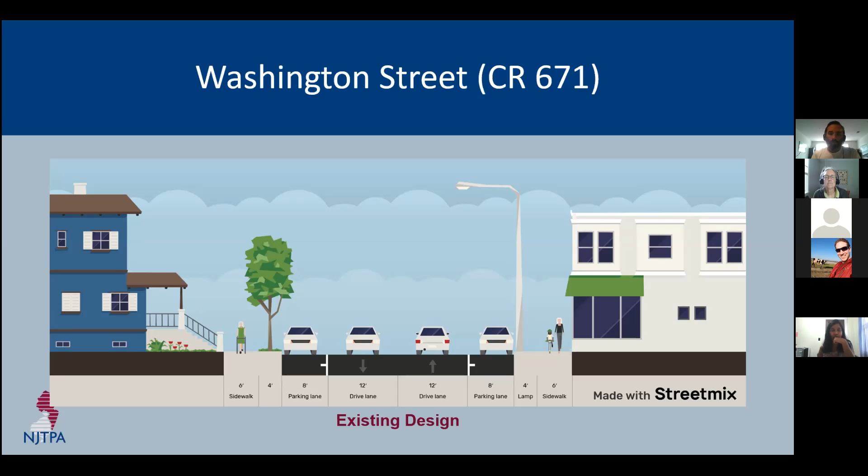So the first issue that we heard during the walk audit was related to vehicle speeding and some confusion about parking. So currently there's no speed limit signs along the corridor. It's not clear actually if the speed limit is 25, 30, or 35 miles per hour. So we propose adding signage, of course, to make it clear to drivers what that speed limit is.

We also observed illegal parking along the corridor. In some cases, this illegal parking was caused by missing or confusing signage. For example, this no stopping sign, like in the picture, has no corresponding endpoint. So the vehicles you see in the background, it's not actually clear if they're parked illegally or if a sign is missing. In some cases, illegally parked vehicles can block visibility, creating a dangerous situation. So that's why it's important to address these parking issues.

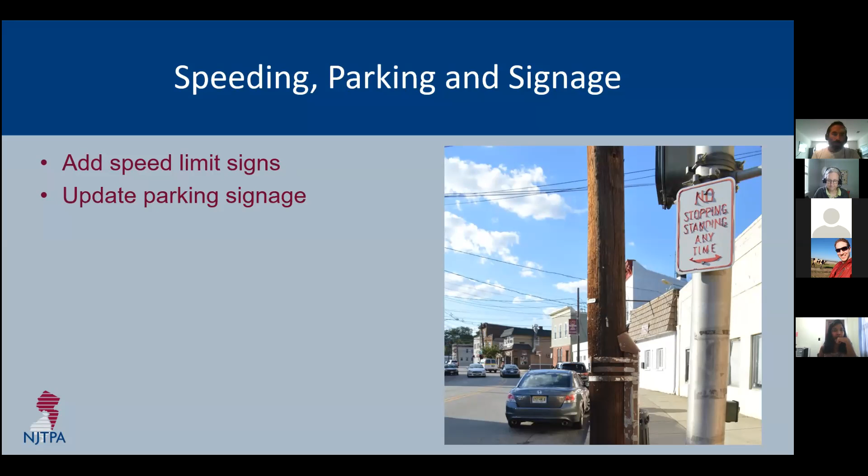Aside from reviewing and updating the signage, we propose clearly defining parking spaces using striping. This has the added effect of visually narrowing the roadway when no vehicles are parked, such as in this photo when there's no vehicles there. This is in Newark. And doing that can help lower vehicle speeds a little bit.

Additionally, by clearly marking the no parking areas, you can prevent some illegal behavior. And as an added benefit, you also avoid angry residents who think they were ticketed by mistake because it's really crystal clear where you can and cannot park.

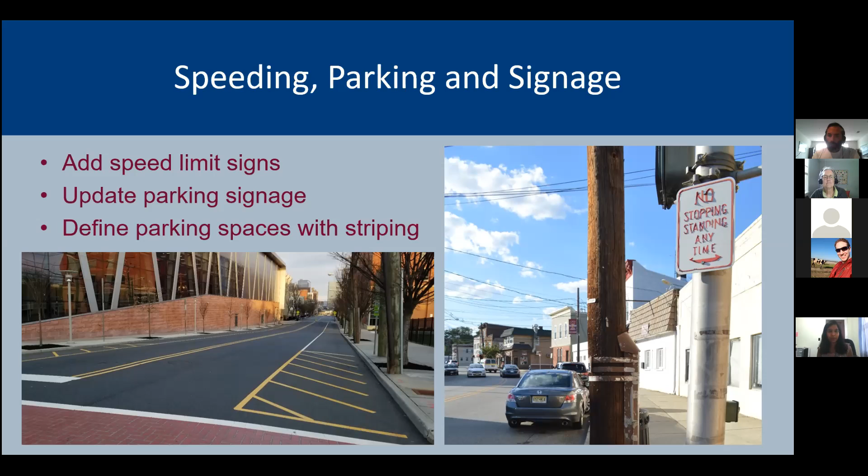All right, so continuing on with the concerns about speeding, parking, and signage, parking next to corners is illegal in New Jersey because it blocks sight lines and can make it difficult for large vehicles to make turns. So aside from striping the no parking areas, we also suggest adding physical deterrents at some intersections. These can include soft-hit bollards, especially in areas where trucks might be turning. But in other cases, this provides an opportunity to add bicycle parking, which is missing along the corridor.

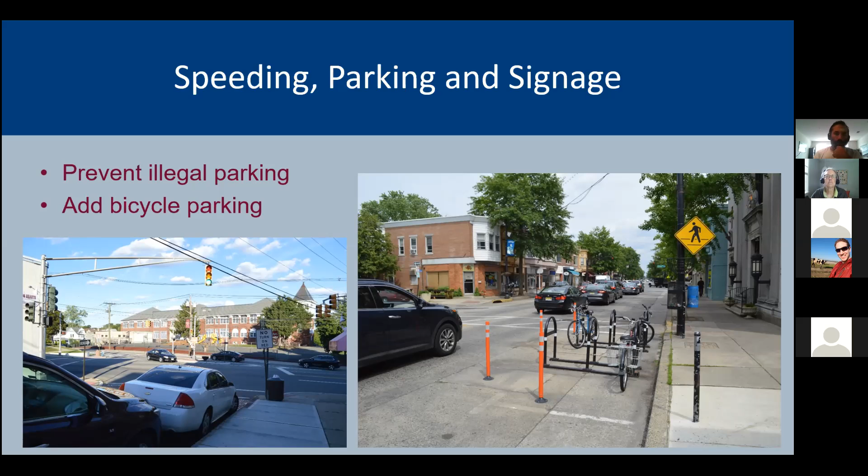Along a lot of the corridor, the sidewalk is pretty narrow and it might not be a good idea to add bicycle parking on the sidewalk. So adding it on the roadway can be a great way to support local businesses. You're adding a new parking option. And again, you're making sure people aren't parking illegally or too close to the crosswalk, like in the picture on the left, even though in that case there is no signage. So again, that's an issue where there's some confusion because there's no signage letting them know what the state law is related to parking near intersections.

All right, so crosswalks. Currently, marked crosswalks exist only at the signalized crosswalks, the ones with traffic signals. However, under New Jersey law, every intersection has crosswalks, and few people are willing to go well out of their way to cross the street. For example, between Washington Street and Main Street, there are 4 intersections without crosswalks, creating a distance of about 1,200 feet between them. So people have to go all the way one way and then come back. And the reality is most people don't do that. They're just going to cross in the middle.

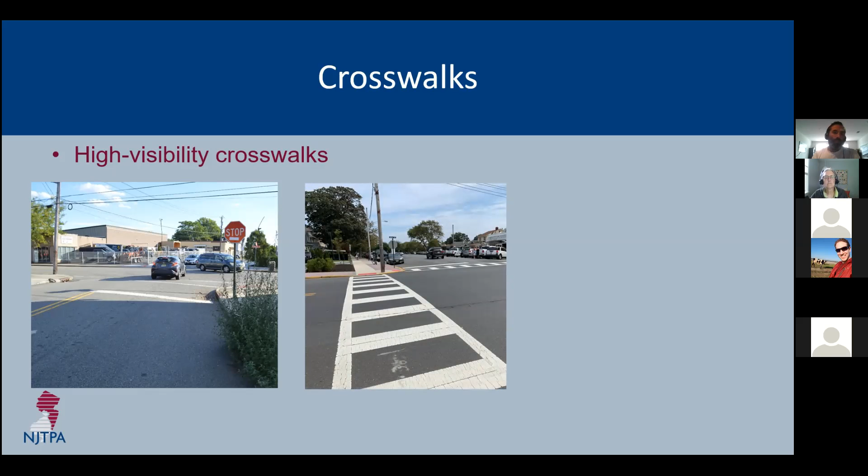That's why we propose adding high visibility crosswalks along the route, especially at 4-way intersections, such as the pictured one at Washington and Columbia. And of course, the report is going to recommend that all the ramps at these crosswalks should meet Americans with Disabilities Act or ADA standards for accessibility. I did notice when I visited that a couple of locations were very recently upgraded, so that's great to see.

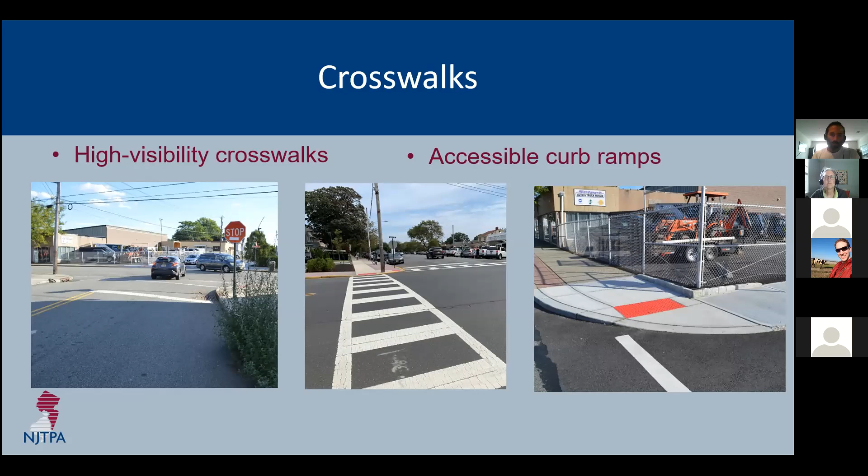So here's an example of how the intersection of Washington Street and Columbia Street could look with the curb extensions, high visibility crosswalks, and added signage to inform drivers that these crosswalks are here. So again, adding these curb extensions prevents illegal parking, gives pedestrians a little more room, creates enhanced visibility when crossing the street, and the crosswalk markings make it crystal clear to drivers that pedestrians are expected here.

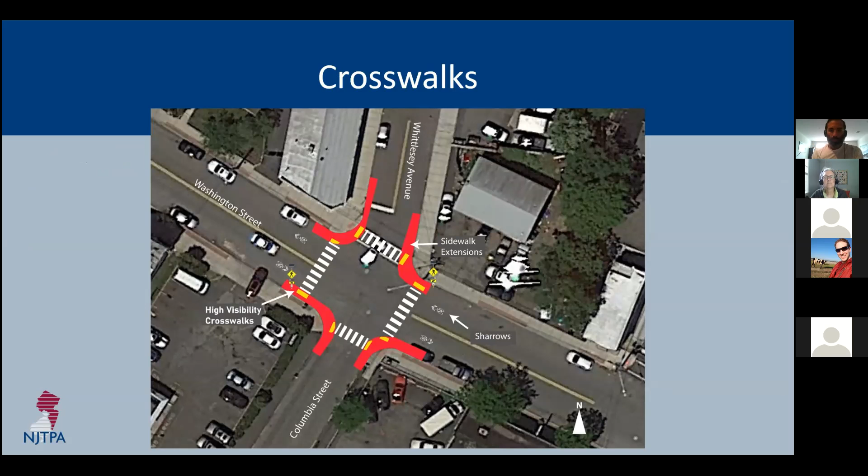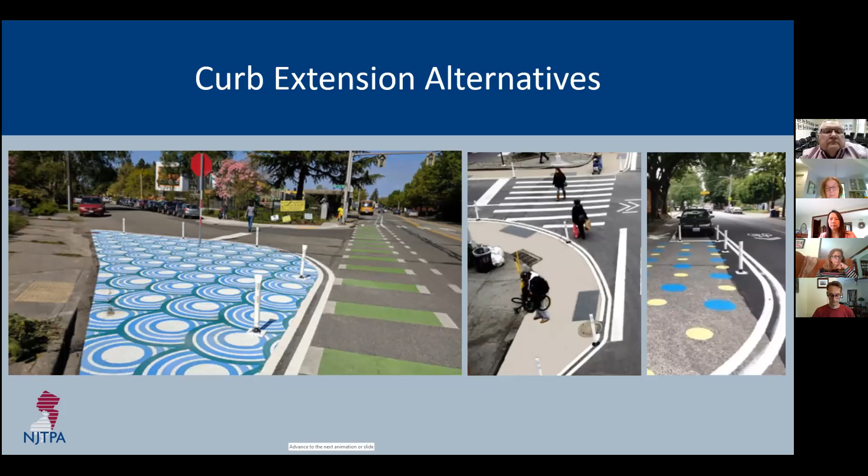These curb extensions can be completed at a low cost in the short term to test them out using only paint and bollards. So that's one way to get started very quickly. But of course, in the long term, you really want to see these built out using concrete. And we recommend that the town and the county develop a standard design for these curb extensions to maintain a consistent look along the corridor.

Ashna, do we have any questions so far in the chat or any raised hands? No. Okay, great. Looks beautiful. Great, thank you.

So in terms of comfort, it's important to think about comfort when we talk about walkability, and comfort can be tied to aesthetics and safety. Currently, there are very few trees along the corridor. That makes walking very hot in the sun and makes the corridor look neglected. When I was visiting, it was a very hot day and I was really sweating.

Additionally, when it comes to comfort and safety, our report is going to recommend pedestrian-focused lighting along the corridor. I visited during the day, but it did seem like the lights are placed pretty far apart. So additional lighting can be helpful, both for traffic safety, but also personal safety.

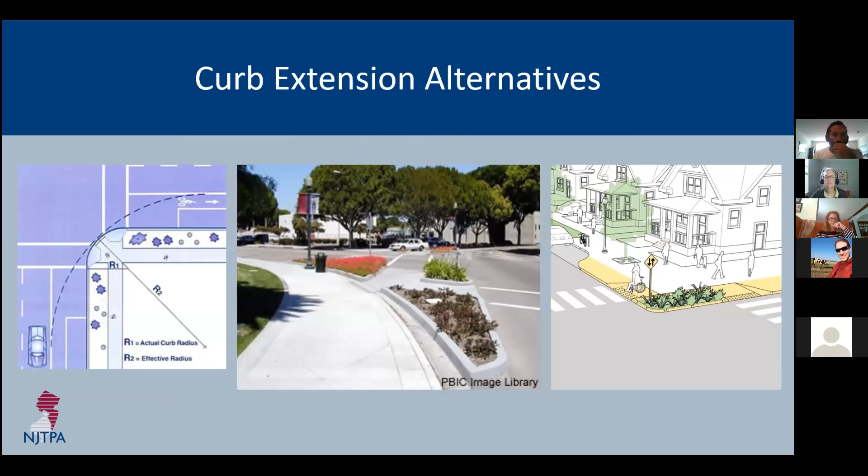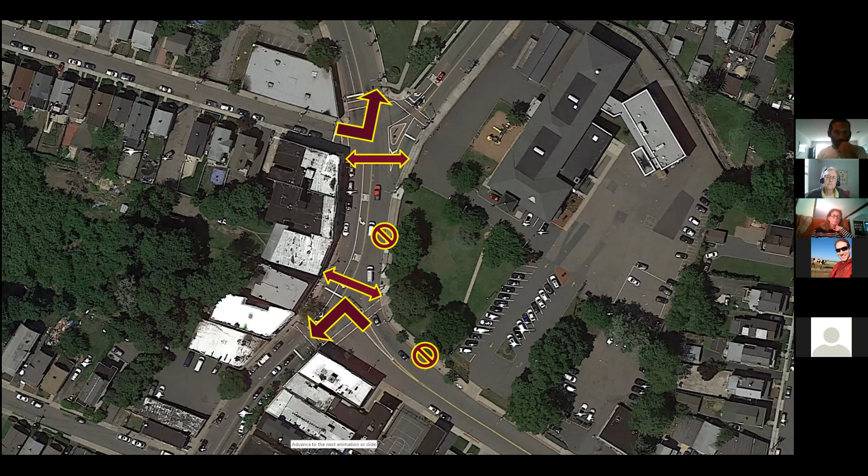So any questions about this minor improvement option or alternative one? Okay, so we're gonna move. Oh, I do see the chat box lighting up. Anything there? We have Jerry's comments that a lot of what we are showing will be addressed with the start of our Main Street road diet. Great, thanks, Jerry. And yeah, my understanding from the last meeting is that that road diet ends prior to arriving here. So this would be a way to sort of continue that up a little bit. Hopefully.

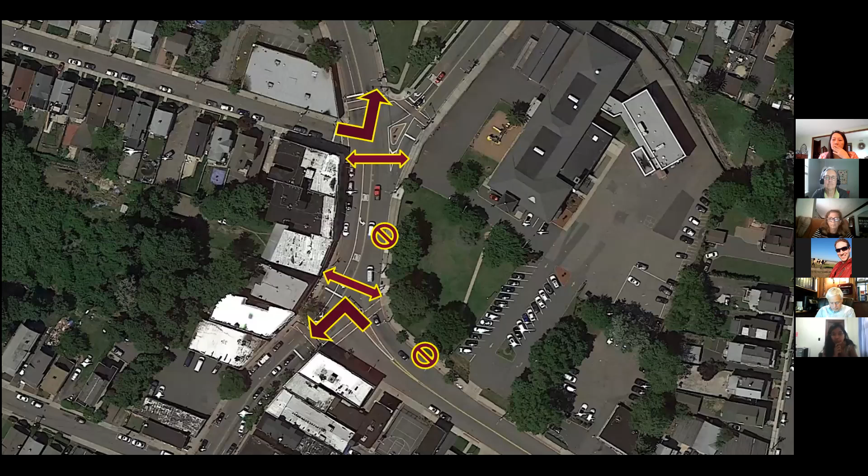But so, we heard that some people are dropping off kids on the right corner of Washington and Main there, even though they're not allowed to. So by physically reducing that, you make it impossible for them to do so using the paint and plastic bollards. So that's the cheapest option, but it can be made permanent; you can definitely widen this island here. I mean, you see how wide that lane is right now? It's supposed to be for one car, but it definitely fits two.

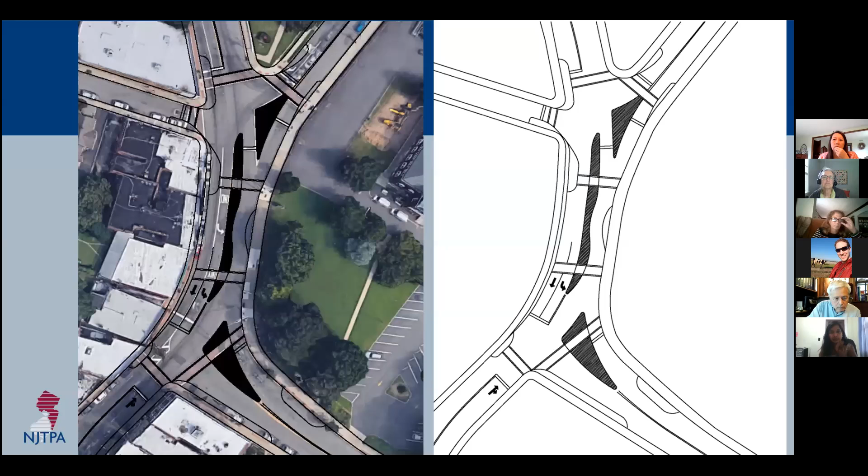And if it fits, two cars are going to place themselves there. So by narrowing that down, you remove that. So that's the lowest cost option. In terms of alternative 2 and 3, which one costs more? Honestly, we could not say.

I don't know. The roundabout requires taking some space from the school away, reconfiguring that whole edge. But there's no traffic signal, and traffic signals can be expensive. If you're reconfiguring the intersection like option 2, you would want to put in new modern signals, which the county would want to do anyway. The ones there are pretty old, but signals can be pricey.

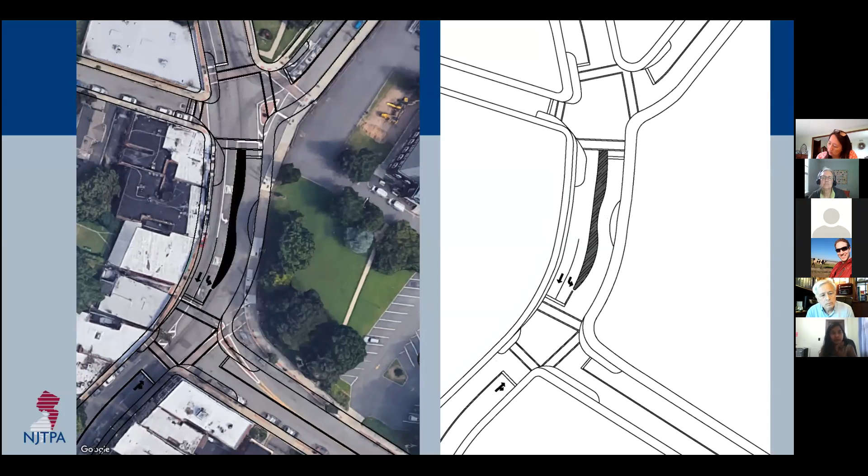I have a comment with that. You're saying that it would have to cut into the school, in that edge along Franklin Avenue. That's where the retaining wall issue, I believe, is with the school, and it's an issue that has been tried to be budgeted, but has been overlooked because of the budgeting issues. It's become a very expensive project,

and I'm just wondering how can we kill two birds with one stone here, and is there a way that we can work in conjunction with the Board of Ed possibly, or with the funds that are available for the Board of Ed for the retaining wall and the town? I think that would make the most sense to be able to make it safe for the students and make the roads wider or safer.

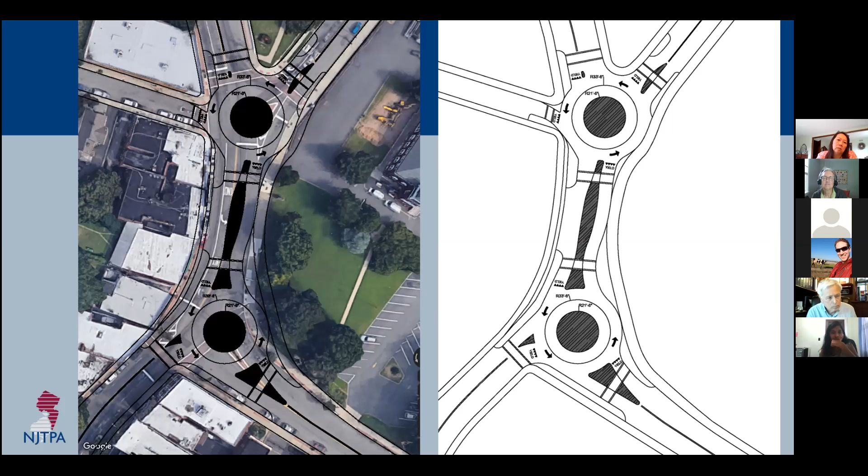Yeah, definitely. On Franklin Avenue, one of the conversations with the Board of Ed with Dr. Cascone is that there is a back entrance further down on Franklin Avenue. On the screen, if you go down towards the right of the roundabout, there is a back entrance to the school, which is often closed off. So students aren't even allowed to access it.

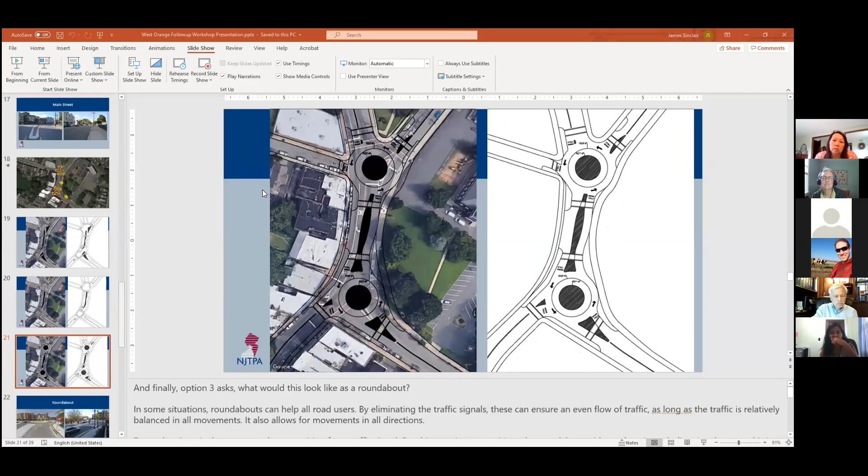And that was from a concern of safety for the school with the school shooting surveys. They had addressed that as a safety concern, which is why it was locked, and why there's not much access for it. But there is a back alleyway leading out towards where you're thinking about putting that, what is it, bike skyway or bike driveway? Roadway, that bike roadway, right? Yeah, the bicycle boulevard.

Right. There you go. I couldn't find the words. I'm sorry. I'm a little distracted right now with the kids and everything.

And so I wonder if there was a way that we can maybe even open it up, since it has become such a big financial situation in terms of safety with the retaining wall right there along Washington. Further back. Yes, right. That whole wall leans and slopes down. And so I know that's been a concern for Washington School, and has become more expensive the longer we leave it off.

Right. So I don't know if NJTPA has an answer to, if they were doing TAP funding for the intersection, if that could include it. I mean, I assume so. If you're having to dig into this, they would have to replace a retaining wall, but I don't know the technicalities of that, but it would definitely make sense, like you said, to get two birds with one stone, especially if they're cutting into this a little bit anyway.

And we'll definitely note in the report that there should be an entrance over here, because getting kids to walk all the way around, that's going to. So that is the entrance right there. That's an opening. It used to be open, but for safety issues, they actually don't allow it to be open anymore, which is also another thing that's been making it harder for parents, is that they can't really just let their kids go, especially if they're younger children.

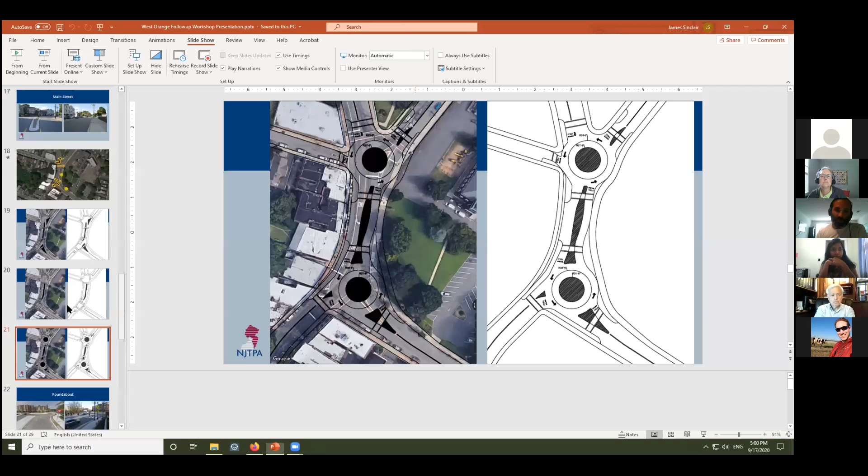I couldn't say whether it would absolutely work in this case, but it's something that could go into an application and undergo serious consideration from those who review the applications. Yeah, there are a lot of considerations for some of these projects where there are restraints in the right of way, for example, and not everything is so black and white. I think that the allocation of funding is fairly flexible on some of those types of considerations.

All right, thanks, Keith. We are at 5 p.m. exactly. So just a reminder, if you do have any additional comments and questions, please send them to heasley@tcnj.com and have them to us by September 24th, please, because we do want to get this report ready to go. Once we finalize the draft report, NJTPA reviews it, and then we send it over to you all at West Orange to make sure it's the report you're looking for. Then we'll make those final edits, and the hope is to have it finalized by the end of October.

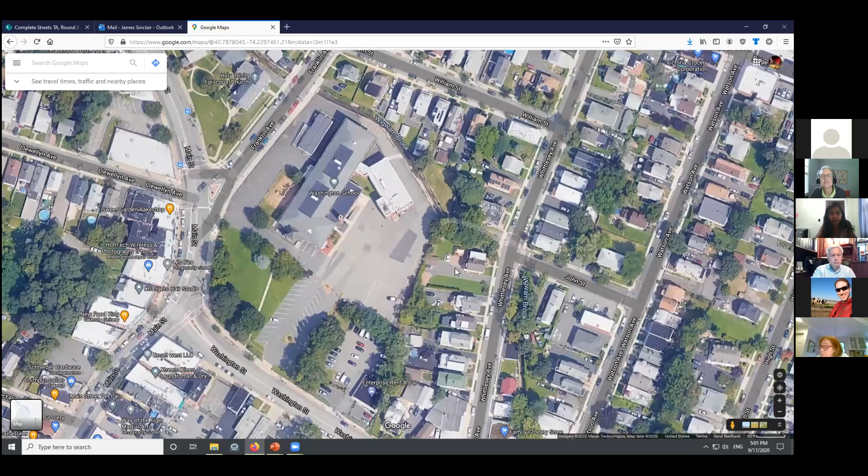Is that correct, Dan? Can I actually have just one more comment? Sure. I know that you said that the back entrance would be a good, what is it, Bicycle Boulevard? Yeah, Bicycle Boulevard. I'm sorry, I keep forgetting the words. But the Bicycle Boulevard, in that same area, would it even be possible to consider doing a kiss and go lane through the back entrance and fixing that whole little area, because it's sloped and it's angled oddly in the back of Washington? I don't know how, I mean, you know.

Yeah, we can see if we can add it as a recommendation. The downside of that is it might encourage more people to drive. And also, I'm thinking of a kiss and go, people would turn in and sort of loop around. That might create some congestion in there. So it might be still best to focus on the bike and walk aspect, but we can definitely see if there's a better area than the current drop off, which is here, which is not that big. And also it backs up onto the main street as well. So yeah, we can see if there's a better solution.

So Anne, did I miss anything? No, I think the town will have the report by the first round for their review at the end of October. This probably won't be ready for full public until maybe November. The goal is the end of October, but it may likely end up being in November when the final report is available. But you do have these ideas.